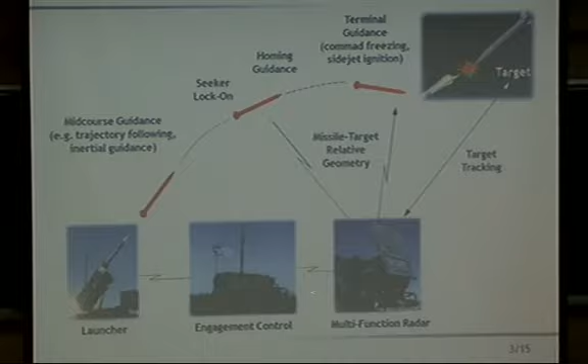Now, if something is coming and this one is the target, then first the multifunction radar system detects the target and gets some information from the target. Then the information goes to the control center, and the control center will give a command to the launcher. Then the missile will be launched.

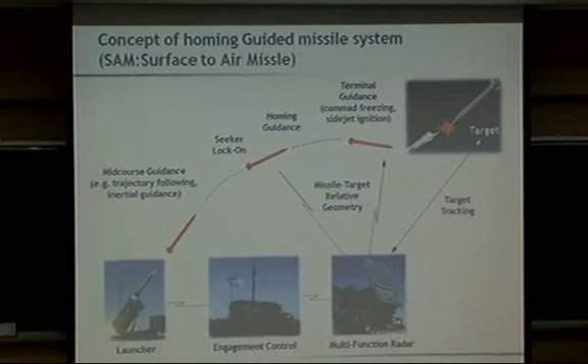The system consists of 3 parts. The first part is just mid-course guidance, which is decided by the initial velocity and the initial position. Then if this one approaches a little bit closer to the target, there is some sensor here, and this sensor detects the target. Then the seeker lock, probably it's their terminology. So this one has now detected the target.

Then the homing guidance starts, and this homing guidance is guided by some sensors in here. Then, if this one is close enough, because of the noise of the sensors, the homing guidance is invalid if it's too close. At that time, some kind of terminal guidance is required to increase the success. So this one consists of these kinds of levels.

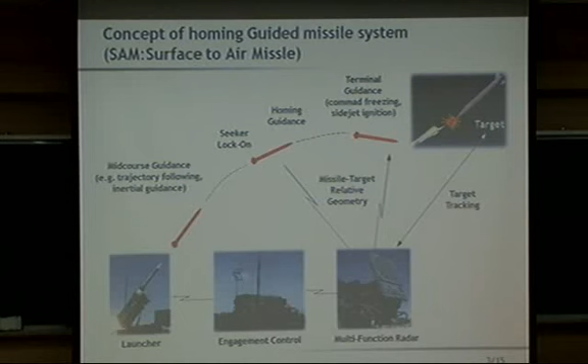This one is homing guidance collision geometry. This is a collision triangle, and the model comes from this kind of picture. What is this horizontal line? This one is just the initial line of sight vector. Suppose initially the target was here. Then at time t, this is the line of sight vector. Then this lambda is the angle, and to make this model valid, this angle should be small enough.

And this one is called the collision triangle. Now here, what is y? Y is the perpendicular distance between the target and the initial line of sight vector. And this one is the PN guidance law. PN, proportional navigation guidance law, is given by this, and this N is called the guidance coefficient.

Now this is the... okay. Okay, so from the picture you can see what these things are, and this one, psi m, is the flight path angle, so this angle psi m. I asked what this one is. Okay, this is nothing. This is just the angle for the missile, but the missile does not go this way. It always goes some other way.

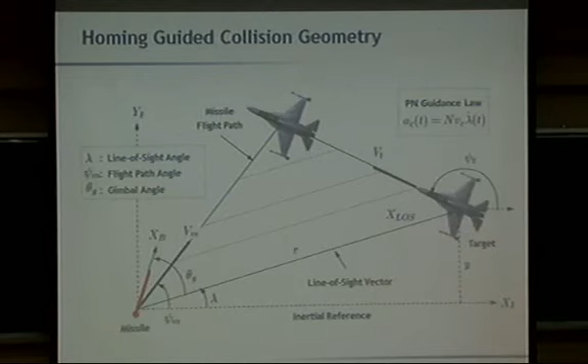Okay, so we need some kind of control system. They call it the homing guidance loop, and it is designed in this kind of way. A_T is the acceleration of the target. This is the acceleration of the missile, and they are detected, and their effect is computed by integrating this acceleration twice. This is probably the notation for the Laplace transformation, and then we measure the miss distance.

So miss distance means the gap. Okay, this is not the miss. This one is the gap. So measure the error, and then compute the distance at the point and find the angle. Then from this system, the proportional navigation guidance system, they compute some command acceleration.

Then this one is applied to the system, and if there is no dynamic lag, if you command this one and it is immediately effective, then there is no problem. Then you can always hit the target, but there is always a dynamic lag. And dynamic lag comes from a couple of things. For example, the sensing. If you sense something and give it to the system,

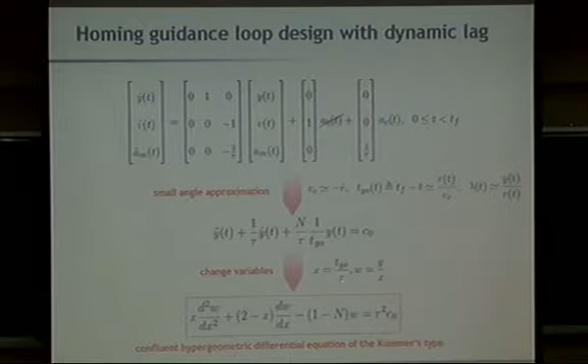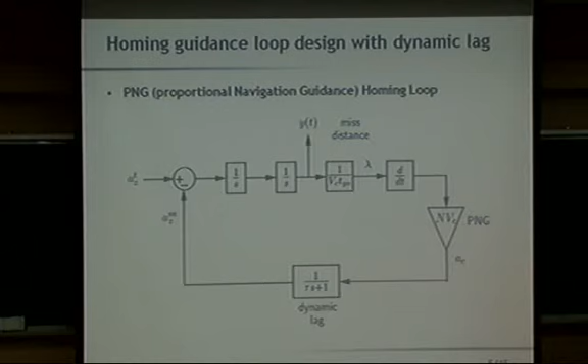Now instead of t, they use t_go. The time to go is the amount of time to intercept the target, and this tau is a coefficient that comes from the time lag, the dynamic lag. Using this new variable, this can be changed like this. Now this equation is the confluent hypergeometric differential equation of the Kummer type.

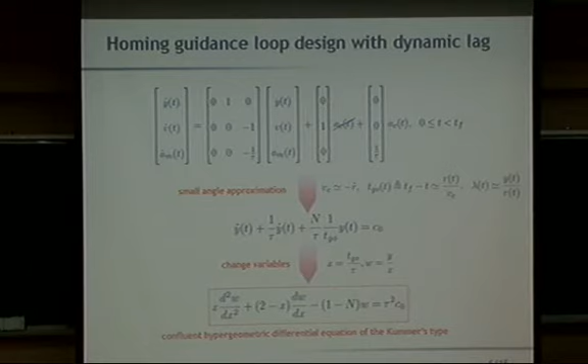So for this problem, if n is an integer, it can be solved using Kummer's basis functions. If n is not an integer, there is no such solution. So with Kummer's method, if n is an integer, we can do this. And for this navigation coefficient, if n is an integer, that's the best case, but the actual one is not exactly an integer, right? And n is usually bigger than 3.

And for the integer case, you have this phi and psi, they are Kummer's basis functions, and they're given by the gamma function. Then solve this, w is given by this, and using w we can solve the system. And having an explicit solution seems very important to them because it saves time,

and that lets you do real-time computation for the sensing of the missile. So the missile itself has some kind of small computer chips, and if they can do the computation by itself and guide it, that will help.

So they want to do that kind of thing. If n is not an integer, okay, we don't have some kind of things. So this kind of computation, Jaewon and Min-Soo Go did the computation, not me. So they know these things better than me. So they somehow found out what they learned from the numerical modeling course.

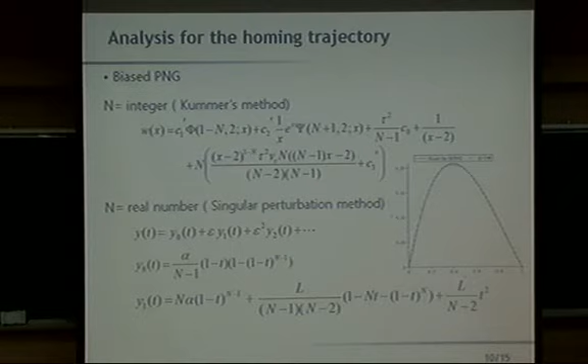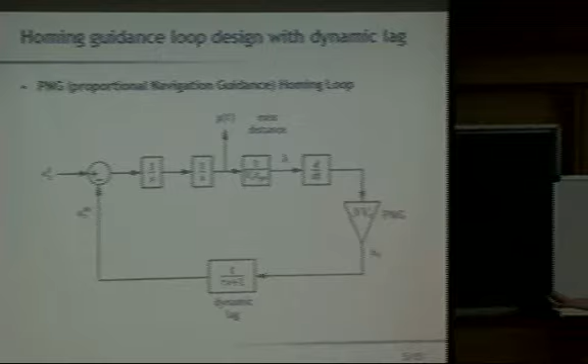And so this kind of model is just the first order model, and we don't know what should be the second order. So this model is the first order model of this homing loop, and for the second order model probably they have to do something. Now, if you have this kind of analysis for the trajectory, then it can be used in many situations. For example, if you know the trajectory better, and if you can compute the trajectory in real time, then you can use this one for the terminal guidance.

For the terminal guidance method, people think about this kind of functional, and this functional measures the distance. The distance, of course, we want to make this one be 0, and CF is the weight. Now A is the acceleration, so this one is the total energy you require to make the control. Then differentiate this one with A, then somehow you can find the solution. And if the weight goes to infinity, then acceleration, this is the command, so somehow this one is bounded.

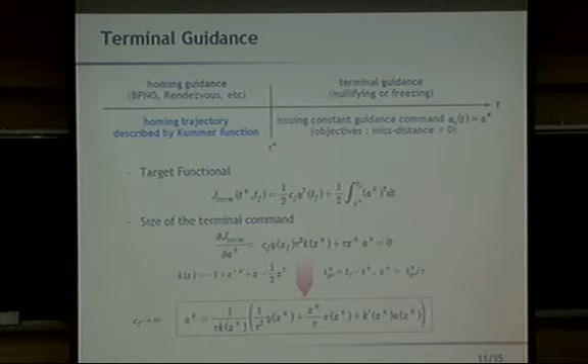Then you're using this method. So in doing this kind of thing, it's important to find out the trajectory. If you can find the trajectory, you can do some terminal guidance. Also, they say that it's important to compute time to go, the time to arrival to the target. If you can estimate this one correctly, then you can apply some optimization technique to control this kind of guidance. And if you have the trajectory, then you can estimate this one better, using this kind of classical computation.

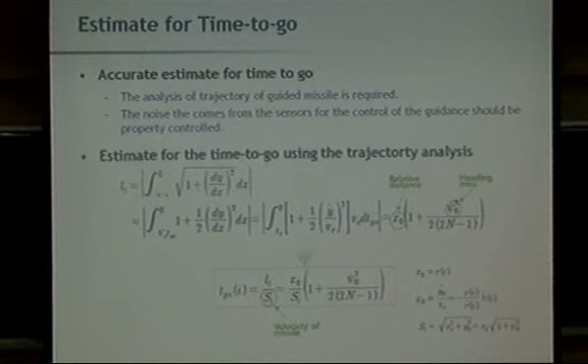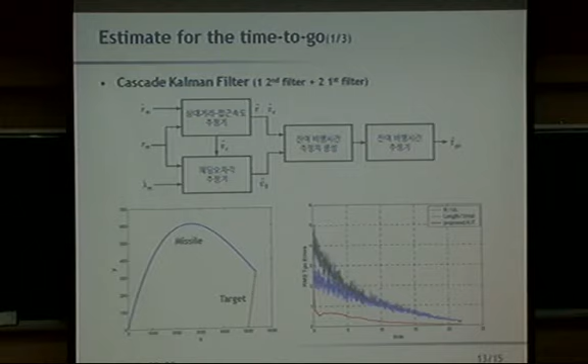Unfortunately, still there are some Korean characters here. Now they did some kind of estimate, and having the trajectory analysis using Kummer function or some singular perturbation, the error becomes the smallest.

And also, one of the issues is the noise, and since there is noise in the sensing process, controlling this noise becomes important. I don't know what's the sigma point between this kind of thing. Probably Professor Hwang, or those people know these things a lot better. So somehow they want to also control the noise in a better way, and to compute the time to go better. Okay, that's it.

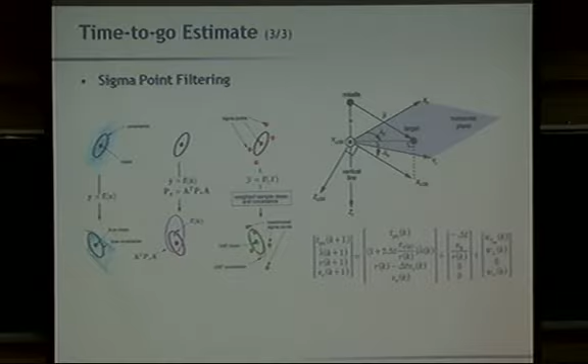And I'm not an expert for this kind of thing. I just want to show you what the problems are. And if you ask a question, probably I cannot answer. Thank you.